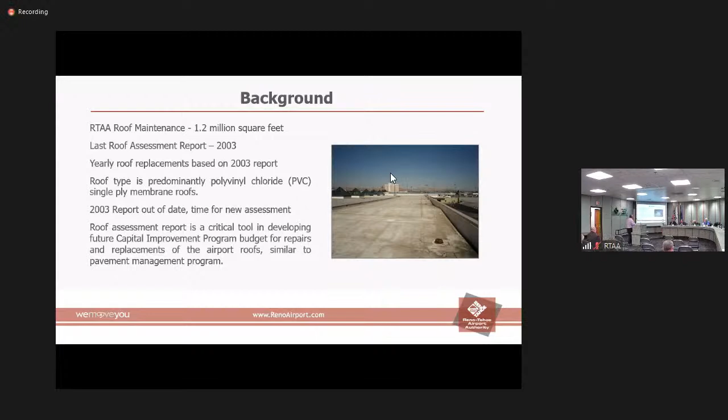And it's similar to the pavement management program. The engineering staff directly selected BTA based on the following: experience providing required services, knowledge of the local weather conditions, knowledge of local labor and material costs, overall performance with other agencies in the Reno area, and the ability to provide and maintain a database for the Reno Tahoe Airport Authority to update as needed.

As I mentioned, regarding overall performance with other agencies, we have connections with people we talk to in different agencies. In this particular case, it was the school district. The school district recently - I think last year or the year before - went out with an RFQ and selected BTA, and BTA has performed really well with them. So that's one of the reasons we went this way.

There are not many companies that provide this service throughout the nation, and there are no local companies that do. We could hire a local roofer to come out and assess our roofs, but they're going to want us to pay for that, and they could set the numbers for these roof replacements - but it eliminates them from bidding.

So this company, BTA, does designs, does the assessments, and maintains that database for us. Based on all this information, the engineering staff developed a scope of work based upon our experience with the roofs, experience with other roofs, and the 2003 assessment. BTA provided a proposal based on this scope of work, and that's what we're here today to get permission to award.

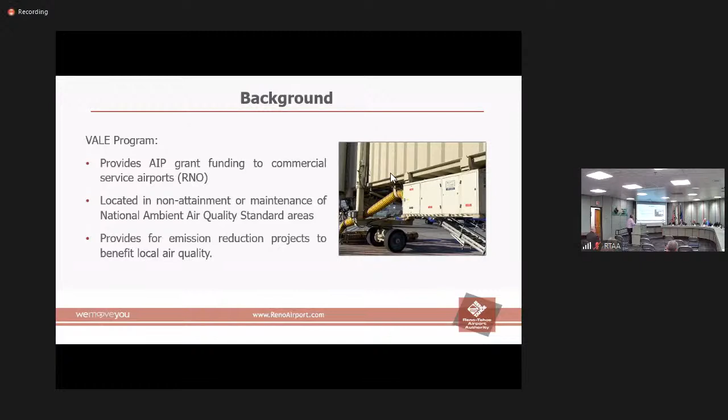The VALE program provides AIP grant funding to commercial service airports located in a non-attainment or maintenance of national ambient air quality standard area, which we are. It provides for emission reduction projects to benefit local air quality. VALE funding is FAA noise and environmental set-aside funds. That means this is a specific set of funds that have nothing to do with our other entitlements and discretionary allotments. They absolutely will not affect them.

The picture is of a ground power unit. It's basically the little beige box there with all the cables sticking out of it, and the airplanes plug into that. These particular units, instead of being the 60 hertz that comes out of your electrical outlet at home, airplanes operate off of 400 hertz, which the best way I can explain it, as explained to me, is it's pure power.

The units have reached their useful lives, and most of them are 19 years old, so it's harder to find parts for them. They will be replaced with more efficient units.

PK Electric will provide planning and design services for the installation of 23 PCAirs and 1 portable PCAir, and 23 ground power units and 1 portable ground power unit. These portable units will come on trailers ready to be used.

PK Electric will also do some associated electrical infrastructure, and they'll also design a submetering system on all these units, just like we did with the ground equipment. Then we can track that usage by airline or by jet bridge.

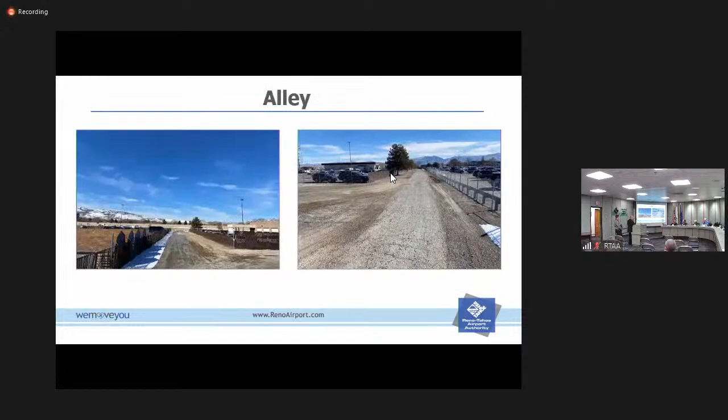With that, the selection of our consultant—if you remember, this past August we did an RFQ to create a list of those interested in doing parking lot projects for us. The statement of qualifications we received had 4 firms, one of which we already chose for our blue lot reconstruction project we're going through now. We went with the next firm, JUB Engineers Incorporated, for this project. It was a qualifications-based SOQ that we used to select the firm.

Currently we did a jump start on this. As you heard Brandon say, we are struggling. So working within our approval process, we got a PSA going for just the geotechnical and survey work to really kickstart this and get the ball rolling, because we want to fast track this as best as possible.

So currently we are in the process of geotechnical and survey work to date. This item is really an amendment to that survey process, including for JUB the design process—the site design, which includes lighting, security, fencing, landscaping, stormwater, all those things just like any developer has to do through the city. All your civil improvement plans, your specs. A big thing here is coordination—you've got TMWA, NV Energy, City of Reno, NDOT, everybody. We've got a lot of people to play with here. And the bidding support through the bidding process.

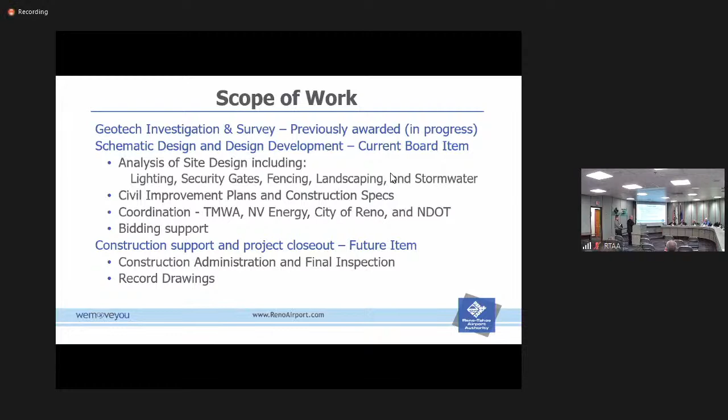So where we're at in the schedule—as I said, we've already started geotechnical and survey through our approval process. This amendment would be at the board meeting here. If approved, we would kick JUB engineers off right away to get design going. This is an extremely tentative schedule, I really need to preface this. This is a fast track. It really depends on the permitting process and what comes back from all those agencies, what we have to do.

Ideally, in a perfect world with rainbows and unicorns, we'll have 90% construction documents in June, bid thereafter, try to be to you in July, maybe August for an award, and construction to start thereafter. We're trying our best to have something for that November timeframe, where operations is really having a hard time for Thanksgiving. Worst case scenario with permitting, you're looking at next spring, but we're going to do everything we can to beat that. I just don't want to make too many false promises to you as trustees if we run into issues with permitting and layout.

This gives you an idea of where we're at in the design fee breakdown—the topo survey with JUB, CME doing our geotechnical. Here's our civil improvement plans, what we'll be asking for in Amendment 1 with JUB Engineers for $261,200. Total design breakout is a little over $313,000.

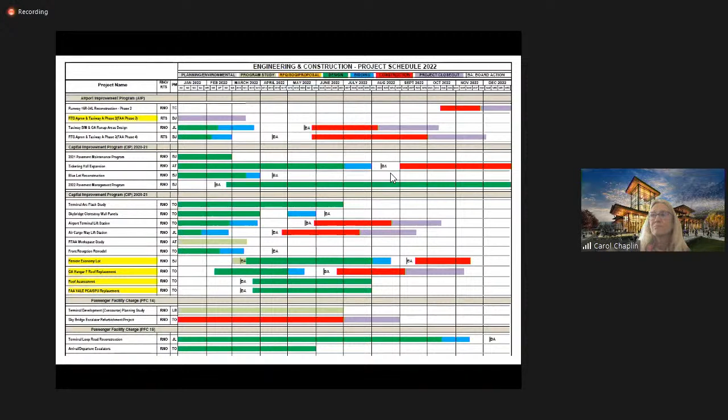All right, so then we're going on to your next thing, which is 6.1, which is the schedule, and I'm sure you'll speed this one up. Sure, I'd love to. Again, Chris Cobb, Manager of Engineering and Construction.

I'd really like to thank Brandon for coming up and helping me with the last item, really helping explain better their needs. It's been a partnership working with them, engineering, and AED on how we're going to get this done. We've got a great team here at the airport that comes together trying to figure out issues and how to move forward. So again, I appreciate Brandon's assistance and our whole team.

With that, a few items on here that are highlighted: the continuing saga of closing out our Phase 2 out at Stead.

That's really getting the final documents from our contractor. We have finally received all the information we need to put into the report - final pay apps and information as far as DBE percentages. We've gotten those into our engineers' hands, so now we can finish that report and get our closeout documents, hopefully here in the next couple of weeks, to the FAA and get that closed out.

The benefit here, even though it's taken us a little bit of time - usually FAA wants you to close it within 3 years, we're doing it basically within a year. So we're performing well with that in our grants. It's just taking a little longer to get through that process.

Scroll down the page - once you get under the capital improvement program, you've just heard these items. First, the remote economy lot. You can see in the light green where we've started the geo and survey, with the board action hopefully on Thursday, really kicking off in design and chasing after that as soon as possible.

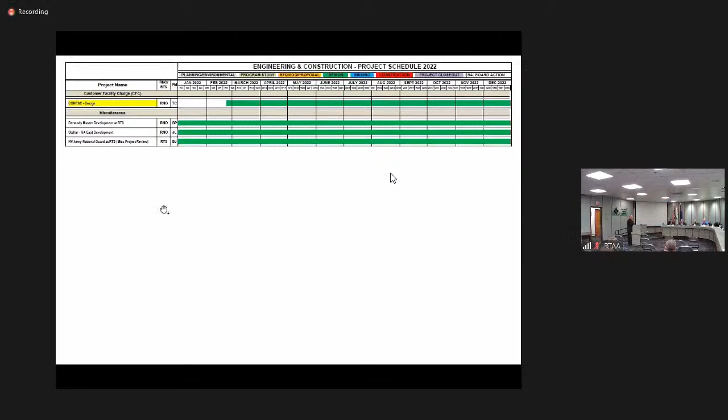Great questions. Time for one. No, I can't. All right, well, thank you. Let's go on to Amanda. This next one is a pretty interesting one.

This one I've been kind of excited about, which is, you remember with the Workspace study, you know, this one that we're all, so it's kind of neat as you're going through this, Amanda. Good morning, Chair, Trustee, CEO Griffin, staff and guests. Amanda Twitchell, Senior Project Manager for the Airport Authority. And I'm really just here for an introduction.

Max Hirschenau with HK Architects, he and his team have been hard at work the last few months on the Workspace study. Just a few things I want to note before I bring him up here: he'll go more in depth into the scope and process, but this study is really a comprehensive look at all occupied RTAA spaces. We looked at everywhere that any of our staff occupy, just to start creating a baseline of small and large things that are going to need to happen over, up to 20 years.

Definitely very comprehensive, but there were a few priorities. We did focus heavily on the administrative space because we decided we really need to get out of here, since there's a higher best use for this space and we're not it. So the idea of getting the admin space out of here has been a priority. And then the second one is the police station, because as you know, you've toured it and you know there are some deficiencies there. So that was the other focus of this study. So with no further delay, here's Max.

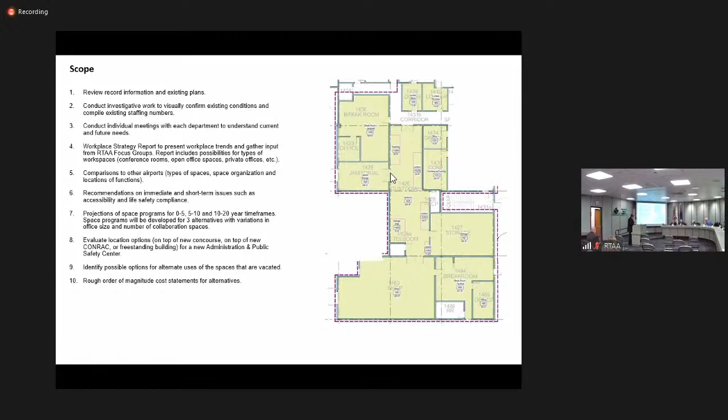I think especially in that 0 to 5, as Amanda said, second floor is packed, police is packed. There's probably not departments just sitting around with a ton of open space wondering what to do with it. So I think this 0 to 5 is going to provide a good short-term roadmap before CONRAC to understand how you might grow in the short term.

So space program is room areas, number of rooms, types of rooms. I think it's been a really robust study, and I think we've really benefited a lot from the feedback from the staff.

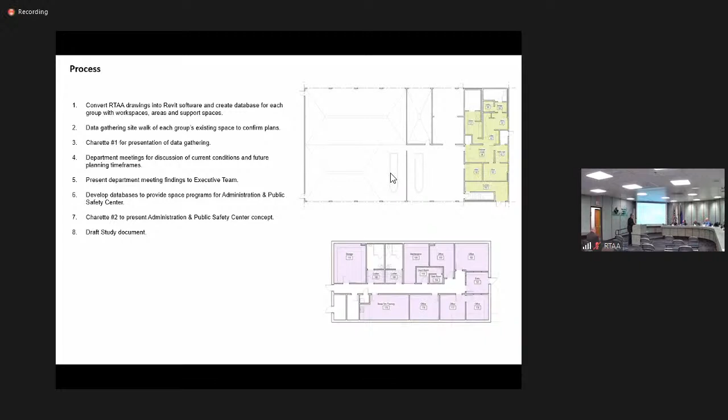So it isn't just about the second floor and the terminal, the little black fill areas. We've looked at every facility on the airport, from the fire station down south, airfield maintenance, the parking office, airport ops, shipping and receiving over on Vassar. So it's been broad. We haven't just concentrated on administration and police, although those are going to be the highlights of our presentation here in a minute. But we've looked at every space, and we've talked with every department, and gotten a lot of good feedback.

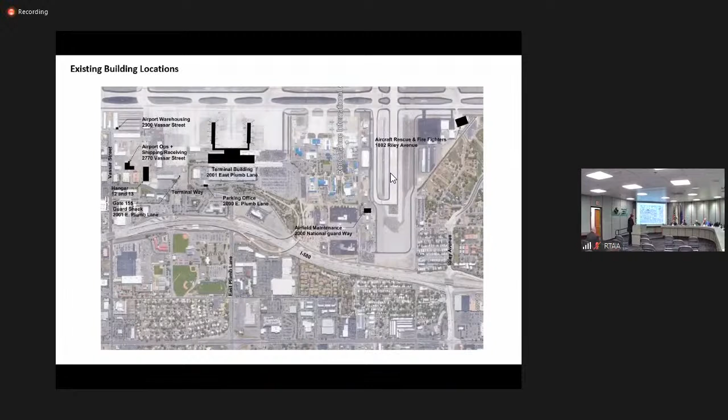So we have the admin, in-terminal, police, building maintenance, building services, security, and then the RNO campus. Darren termed it the campus—I love that, I think that's awesome.

So all of the functions from airfield maintenance, again airport ops—some of them are co-located, let's say at 2770 Vassar. Others are within their own, like airfield maintenance, airport fire. And then we did include Stead as well. I haven't touched on that yet, but this is an organization-wide effort. We met with Scott, had a great meeting with him, and talked a lot about some of the Stead needs. We're not going to go over that today, but it is a part of the draft, and it will certainly be a part of our final document.

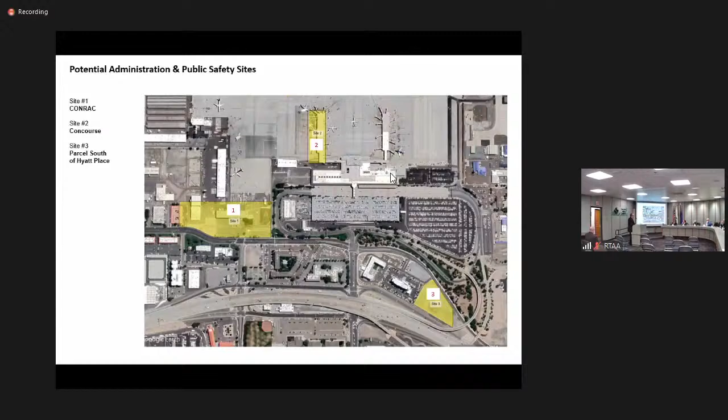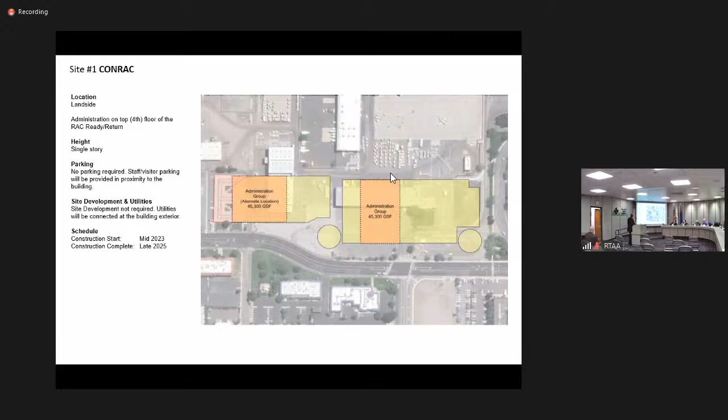So I'll go briefly through them. This is the Conrac, so we would put the 45,300 square foot administration group on the top floor of the Conrac. That has not been totally determined, but it seems functionally like that's where it's going to go - we're not going to insert it in the middle of the ready return, and ground floor space is valuable. So the concept is it goes on top of the Conrac, 4th floor. It has some benefits - there's going to be utilities brought to it, and it's relatively close to the terminal. In terms of schedule, construction start mid-2023 and construction complete 2025 - pretty aggressive. It really follows along with the Conrac, and would need to be plugged into that process for it to be developed.

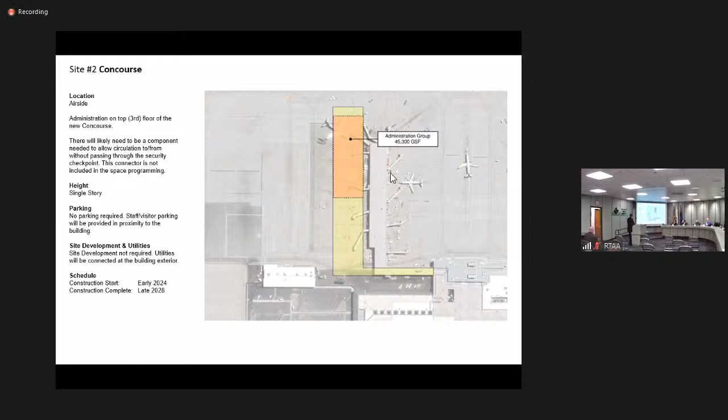So that's site 1. Site 2 is the concourse. It would go on top of one of the 2 concourses, probably the first one that gets developed, 3rd floor - the ramp level, very valuable space. The concourse level, the passenger level, obviously we wouldn't put it there, so it would be on top. One thing to think about: if operations are like they are now with a fair amount of public engagement, we need to get the public out to it. We haven't included that in our analysis, but somehow you'd have to get the public out there, probably on top of the concourse, and likely without going through security. So there are some challenges, but I think it does fit. Our 45,300 square foot rectangle would fit - this is a drawing from the concourse planning study going on right now, showing their concourse footprint. So it does fit. Construction would start 2024 and complete 2028, paralleling the concourse project.

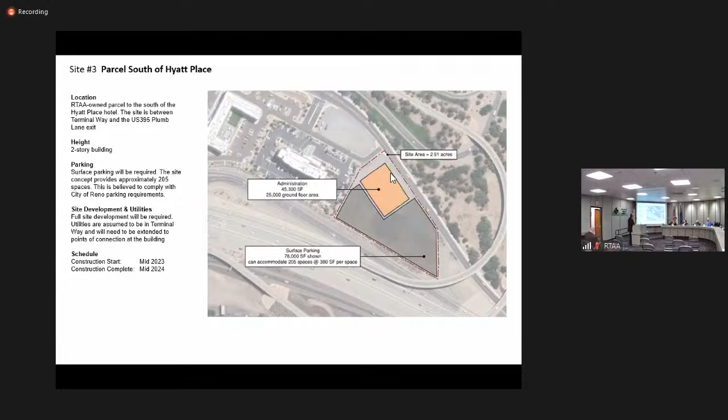The 3rd parcel is a vacant piece of land south of Hyatt Place. This would be a more traditional office building, probably 2 stories, with surface parking. Again, the airport does own the site. There aren't environmental issues that we're aware of, but we haven't really gotten into that either. It's probably parked pretty close to what the city's going to require - it may be a little underparked, but I think those are things dealt with in later phases. It has a similar time frame to the Conrac - being an empty site, you could start now and finish by maybe mid-2024. So in a very aggressive way, this project is happening in the next couple of years, and it really needs to be considered that way, given some of the opportunities out there for the airport authority, and some of the challenges with just the 0 to 5.

So, workplace strategy - I'm just going to hit this briefly. This came from one of our partners, Hendrickson Butler, who's a local furniture representative, and they do office environments.

One of the big three was really this individual focus, this idea that folks are busy out here, they've got responsibilities. So the idea is to focus individually, but also collaborate and socialize. I think that has woven its way through our discussions with staff and a lot of our space programming.

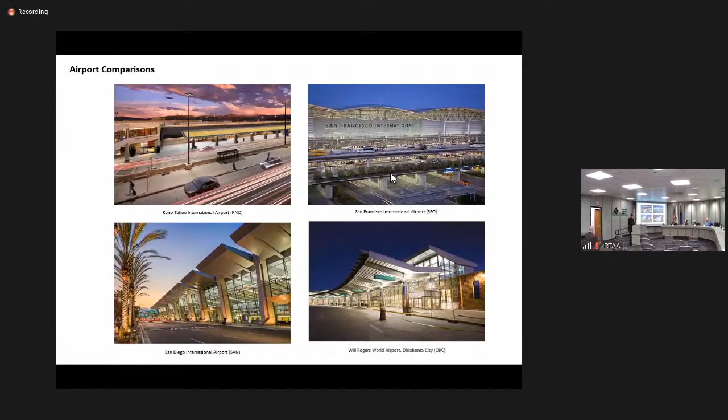We did some comparisons with other airports: SFO, San Diego, and Will Rogers World Airport in Oklahoma City. These are airports that one of our partners, HOK, has a lot of experience in. We've got a lot of data, and I know this is probably relatively difficult to read, but I'll hit on a couple points. There's variation in where these are located - we're talking about the administration piece here.

They're actually in different locations, as you might expect. Oklahoma City's embedded in the airport, much like RNO. SFO and San Diego are actually remote. In the case of San Francisco, probably further away than the rental car, maybe twice as far. San Diego, it's interesting - they have a landside admin building that's not part of the terminal right now. They're actually building a new one, a little further away, but still outside the airport.

So I think this airport comparison has been helpful for us in understanding and reinforcing that administration probably doesn't have to be in the terminal. In many places, just because of the value of space that Amanda mentioned, there really aren't admin spaces in the terminal. Just a couple other quickies.

In terms of workstation counts, there are 213 workstations at San Diego. Outside of admin staff here, administrative assistant staff, there's none at Reno. There's no workstations. So just that environment we kind of talked about - what are the trends?

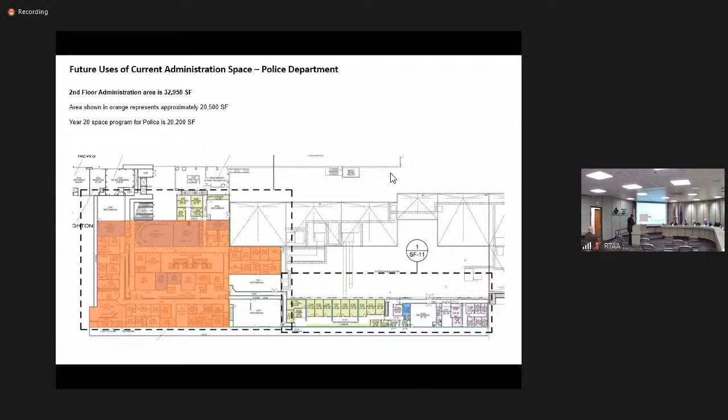Part of our scope is to understand how this space might be used by others. As the police concept actually came up during the study, in some of the early stages we talked with staff, and again these are largely coming from staff - possible uses for this second floor. We're looking at about 33,000 square feet, so a pretty significant amount of space.

TSA, airlines, AHA, Southwest is growing - I think there's probably a number of them that are growing. So airline operations up here, we're basically above the ticketing counters, above the airport airline operations area. Maybe second floor retail, some training rooms, job fairs. We've drawn these little arrows - there could be relatively easy ways to get here from airside. There's been a lot of talk about tenants needing space, airlines maybe needing space.

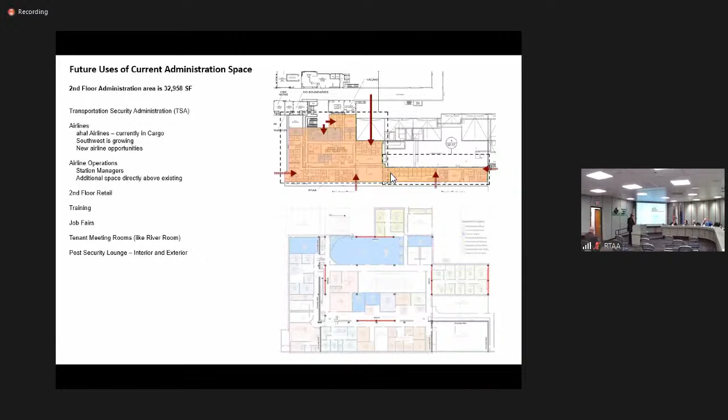Maybe a post-security lounge, maybe a rooftop idea so you could see the planes come and go - post-security. So a lot of options, and we're going to roll these up and include them in the report. The bottom drawing is a drawing of the structural system - I guess maybe just ask you to squint. The fact that there's not a lot of color on there means it's a post and beam structural system, steel columns, pretty open, and at this point in our feeling really pretty easy to improve, do a tenant improvement. So I think it offers a lot of potential.

So, work completed and next steps. I've summarized it today - the draft study has been completed. We are doing test fits on the CONRAC and also for the police, like we talked about.

Just some big picture next steps for RTAA: we're going to incorporate the admin space programming into CONRAC - this is actually ongoing - continue the analysis of the location for police, and then really hammer on the 0 to 5 year staff increases we heard and align those with existing space available, or maybe not available, as the case is. I think those are three big ones that will come out of the report in the short term, and some of them are ongoing right now.

For us, we're going to complete review of the draft - it's in review right now by staff. We've gotten some comments, we're going to finish our QC, and incorporate review comments into the final workplace study. We're anticipating completion of the study in April of this year - basically next month we're looking to put a bow on this and put it out there to the world and let it be used.

So that's it, I know there's a lot there - there's a gazillion times more in the report, so I hope I didn't take too much of your time. But really exciting project - I think it's going to pay huge benefits to the airport authority just in terms of understanding the workspace, and it really hasn't been done, I don't know when the last time it was done. So we've really enjoyed it. The staff, chiefs, all the way down to everybody we talked to have just been fantastic. We really appreciate the chance to speak to you today about it. Thank you.